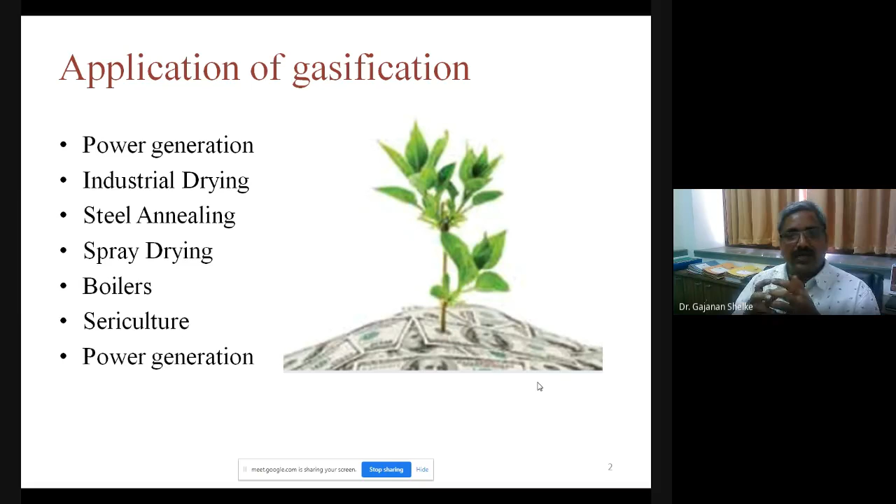I am not always in favor of jungle cutting, so that we use biomass, but there is ample agro waste - there is rice husk, soybean husk, wheat husk, moong husk. So all these husks, ultimately it is wastage. So we have to use this.

Then first we have to learn the gasification process. What is meant by gasification process? We know combustion - what is combustion? Suppose we take fuel as methane, CH4. CH4 in presence of oxygen, when it burns, it produces CO2 and H2O. There will be complete combustion, CO2 and H2O plus energy will be produced.

So this we are saying is the combustion process. But gasification is what? Gasification is a partial combustion, meaning the amount of oxygen is less than what is required for the combustion purpose.

So gasification process has various reactions. First part is the oxidation reaction, second part is the reduction reaction. So it is a thermochemical process - heat is there, also chemical process is there, so reactions will be there.

The reactions are: oxidation reaction, C plus O2 gives CO2, and it will liberate 393.8 megajoules per kilomole of energy. Hydrogen is there, H2 plus half O2 gives H2O plus 242 megajoules per kilomole of energy. So this is the oxidation reaction, meaning combustion is there.

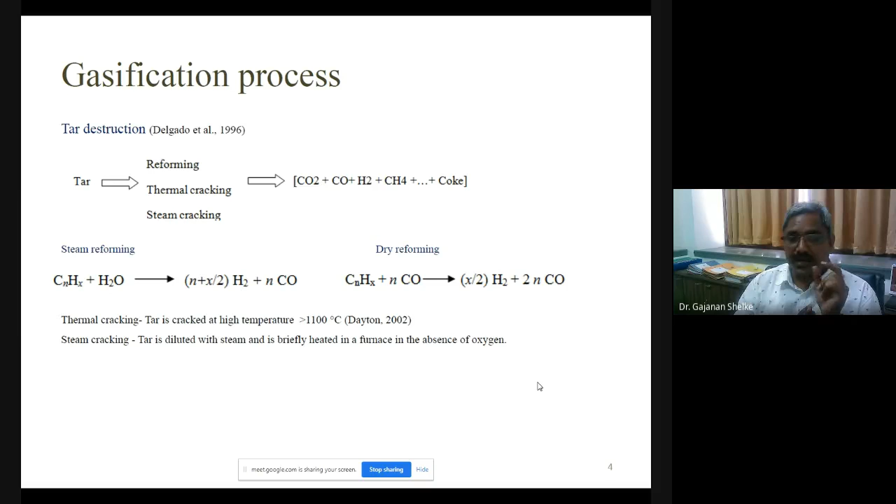Researchers have studied that the pyrolysis process is a thermal process occurring only due to heating in the absence of oxygen. Similarly, in steam cracking there is no oxygen - in the presence of steam at high temperature, tar is cracked. What is tar? We'll learn that afterward.

Then come to the main point - we are starting with the gasifier. The device in which the gasification process is going on is called the gasifier.

Then there are two types. Major types are fixed bed and fluidized bed.

Fixed bed means what will be the fuel inside it? That is, in batch we are providing it. Suppose a container is there, so we are feeding biomass in it, around 30 kg, 40 kg, maybe up to 100 kg as per the capacity of the gasifier. It will be sealed with the surrounding, so there will be no interaction between the container and surrounding. Hence the mass of the biomass is fixed. What we have to gasify, that mass is fixed. So it is called the fixed bed gasifier.

Then fixed bed gasifiers, there are various types of fixed bed gasifiers: updraft gasifier, cross draft gasifier, and downdraft gasifier.

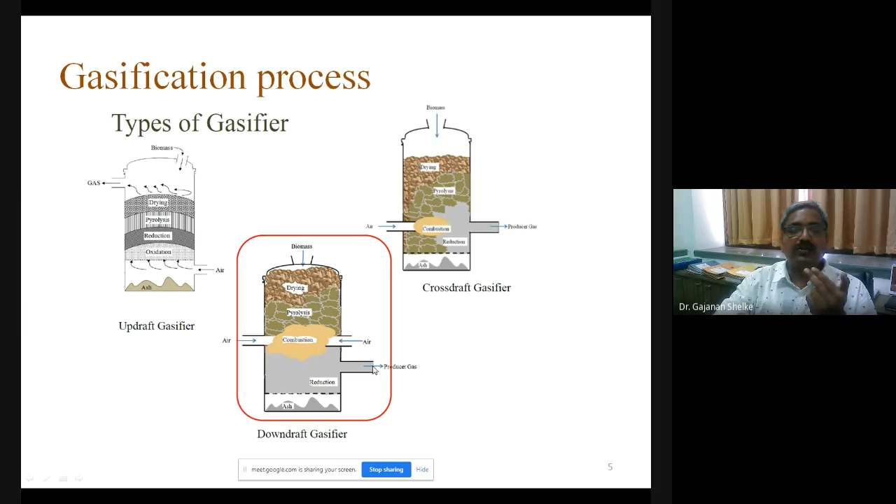Here reduction is going on, and this reduction produces the producer gas. As the flow is downflow, the flow of the producer gas is downward, so it is obtained from the downward side. So it is called the downdraft gasifier.

Then next is the fluidized bed gasifier. One thing you learned is what is the fixed bed gasifier: fixed bed gasifier means we are providing the feedstock in batches. What is the fluidized bed gasifier? Here feedstock is fluidized.

Now what do we mean by fluidization? Here the question will come to mind that biomass is a solid, so how are we saying that it is fluidized? What do we mean by fluidized then? How can the solid work as a fluidizing material? What is the property of fluidization?

So fluidized, again a thing will come to mind: there will be a liquid, it behaves like a liquid, so it is fluidized. But not now, you can see this bottle, in this bottle there is water.

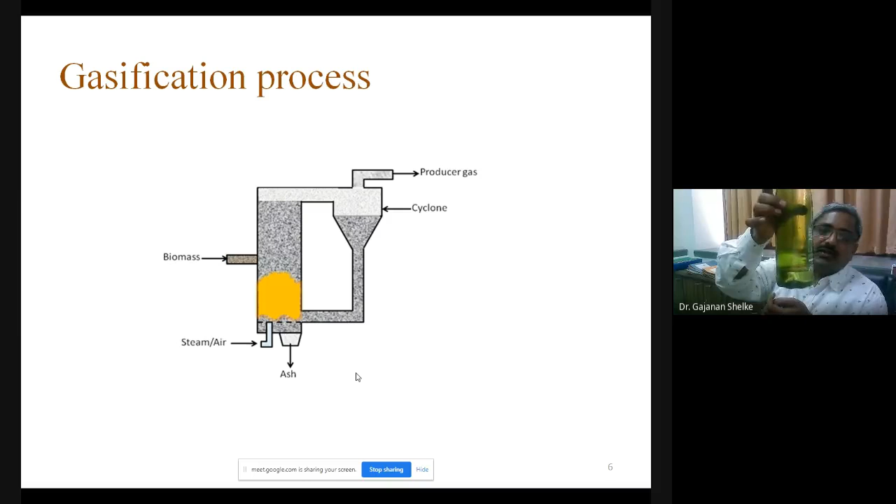Just I will explain this with another figure. We know, suppose we are taking a glass of water, and this is the glass of water, it contains the water. So what happened? Suppose you tilted this glass in this way.

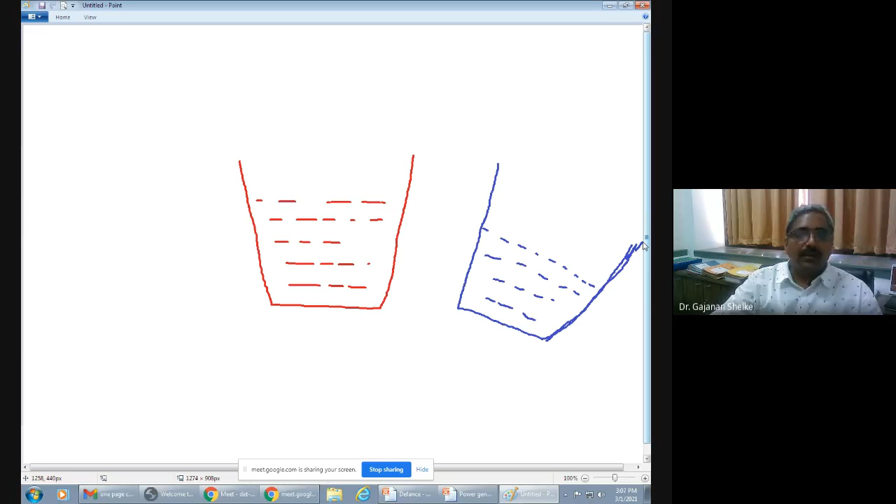Okay, now this glass is tilted. So what about the water? Will water be in this position? Will water also be in this position? No, not at all. It will not be tilted. So will this water layer be in an inclined position? What will be your observation?

Have you tried this sometime? Okay, second example: in the morning you are taking tea. In a cup, when the cup is kept on the table, what will be the level of the tea in the cup? Now you want to take that tea, so you are tilting the cup. What is your observation? Is that layer also tilted? Never. This layer will always be horizontal.

Fluid always maintains the horizontal layer. Though it is tilted, the fluid will always maintain the horizontal layer. And if any solid possesses this property of the fluid, that is called the fluidized material.

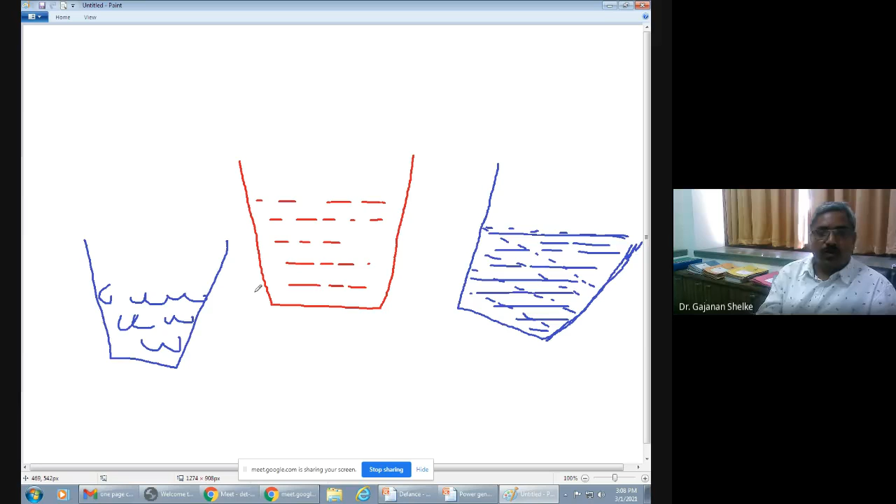Then sand is there. Have you observed sand? Take sand in a cup and just observe what happens. If you tilt the glass, what happens? That sand also takes the horizontal position. So such kind of material is used for the fluidization purpose.

Using this principle of the solid material, using this fluidized property of the solid material, we are obtaining the fluidization process. Now here you are observing the figure. In this figure, an aerator will be there.

So steam or air will be entering. Here there is a mesh of small holes, about 1 mm to 1.5 mm, sometimes 1.8 mm holes made on this. So through this, air is passed. So this air, here a bed of sand will be there.

Bed of sand. Now above this sand we are pouring the biomass. So what happens when this air is aerating, when air is coming at pressure inside it? That sand just behaves like a fluid. Just as you observe bubbling if you pass air through water, the same pattern will be followed here.

And what is happening then? This sand carries the biomass with it. That is the fluidization process occurring with the sand for the biomass.

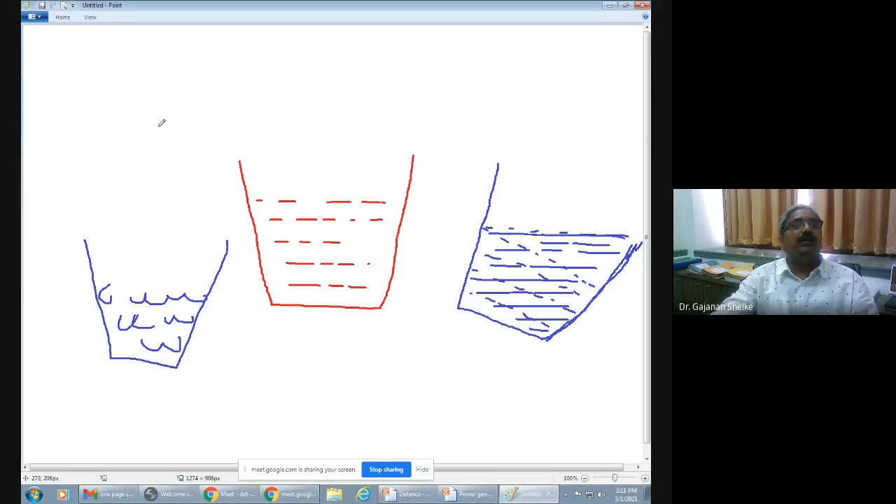So here is the cyclone. You are observing the cyclone. What is this cyclone? Cyclone separator, you may have heard the name. So how will it be? The figure is in this fashion.

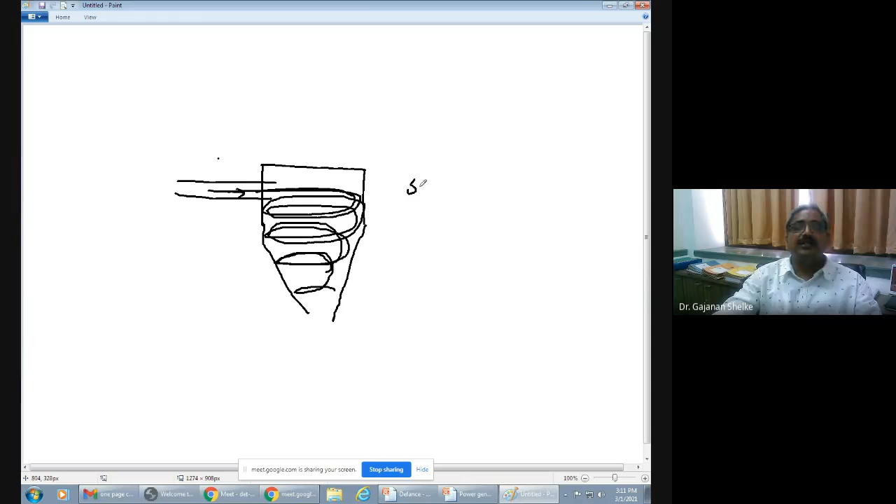So gas is coming from this side, moving like this. What will be the material? Here there will be centrifugal force. Due to this centrifugal force, it will separate solid and gas. This will separate the solid from the gas.

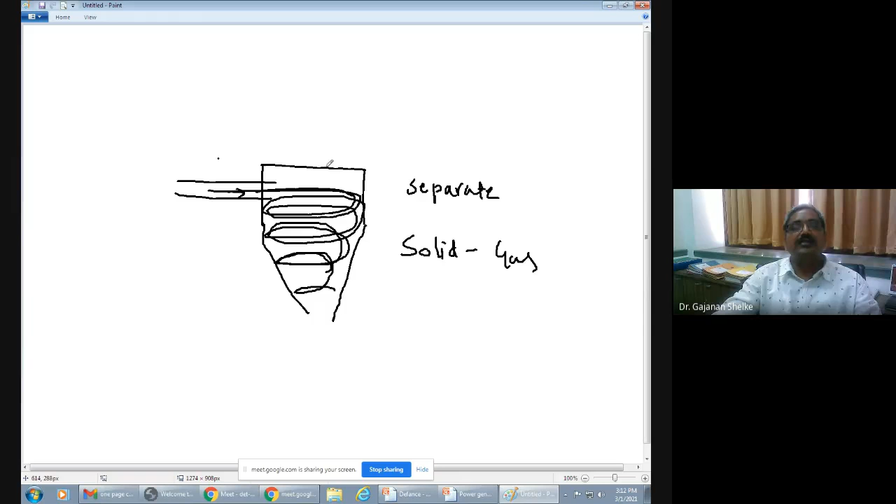So what about the gas? Gas is light, so it comes from the top side. What will be the outward product? Because when it is coming from the fluidized gasifier, not only gas is coming — since this is the aerator, air is coming, aeration is going on, and sometimes by a centrifugal pump, or sometimes by a compressor or centrifugal force.

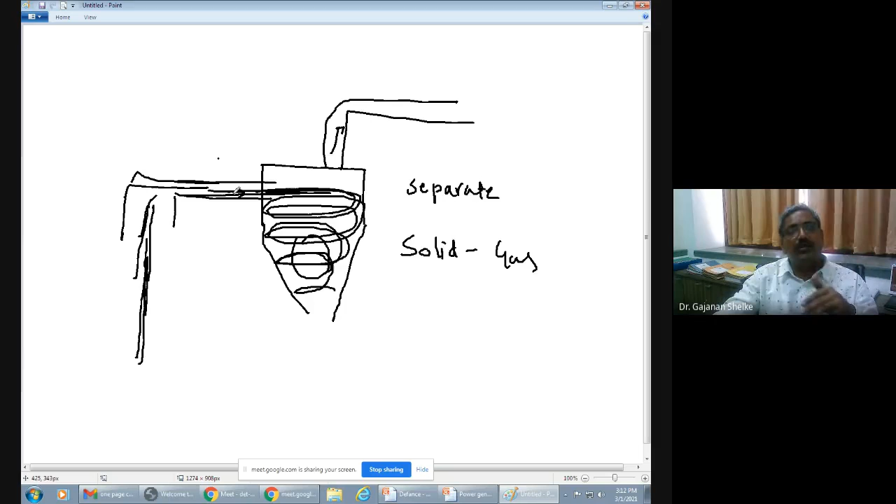Okay, so here air is coming along with unburned hydrocarbons, so the solid particles come downward and are again provided to the gasifier unit. So this is circulating. Hence it is called the circulating bed gasifier.

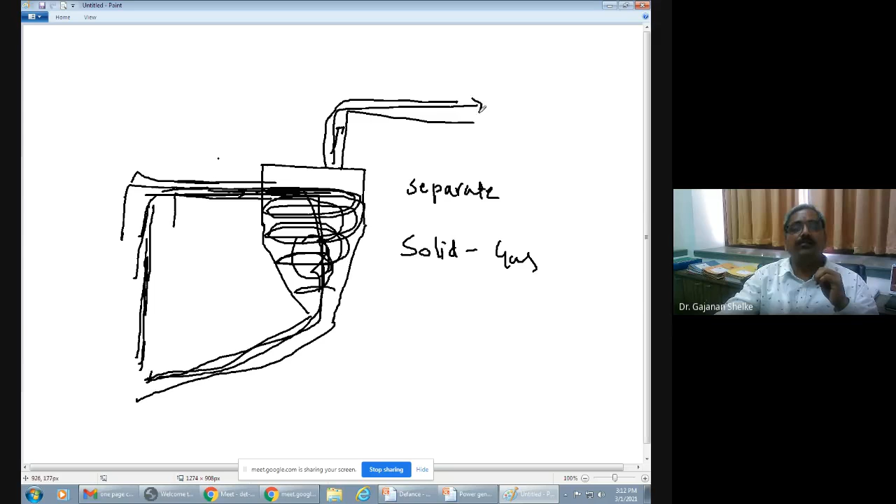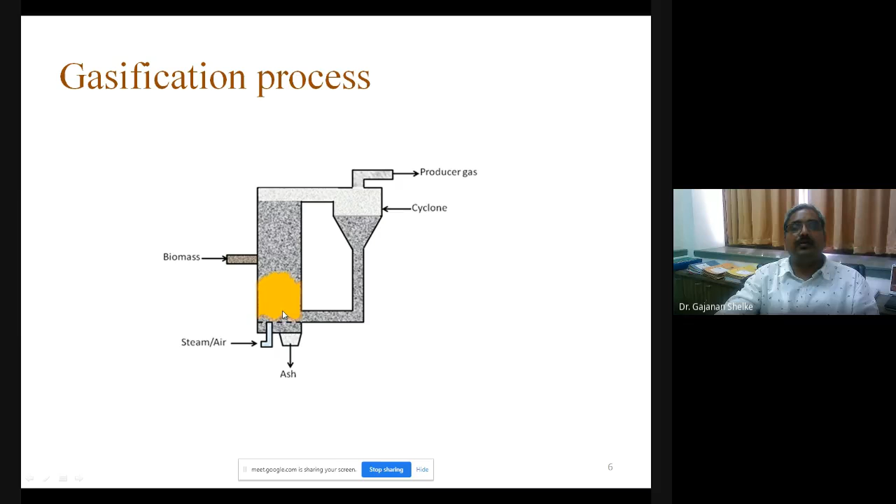Gas is coming from the top side. Here you are observing the cyclone. Under centrifugal force, this solid biomass is returning again, and this producer gas is coming from the top side.

Heavy hydrocarbon means it could not break easily at a low temperature. We have to go for thermal cracking up to 1100 degrees Celsius. So this is how its nature is. It is not only heavy hydrocarbon but also sticky in nature.

So this was, we had visited with the kindness of Honorable Mahanta sir. I got the opportunity to visit this plant, and at that time there was a Ramakrishna Gov owner. He was a literally frustrated person, because this tar was the main headache for him.

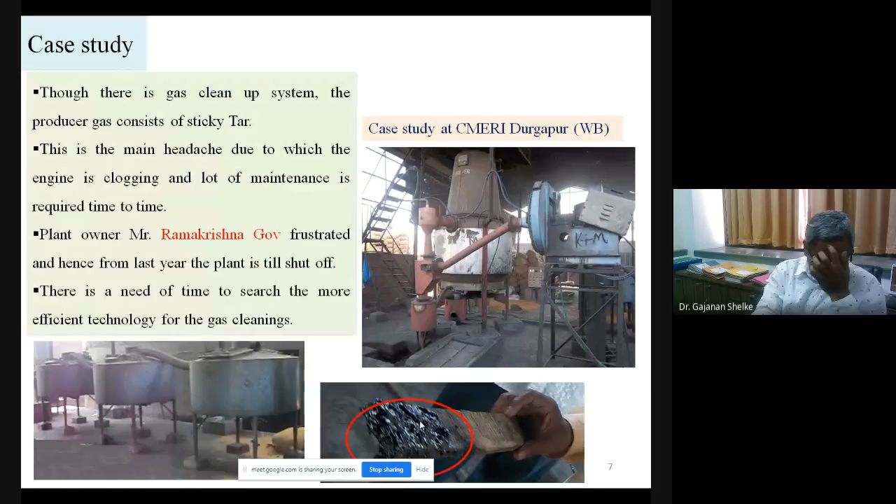But ample of tar, what to do with this tar? Coal is formed, bamboo charcoal is formed. After that, what about this tar? Liquor can also be used in various chemical industries. But what about the tar?

So this tar is used for road preparation, but it is a heavy hydrocarbon. If we succeed in cracking this tar, again a gas will be produced, and again we can have more power generation through this tar.

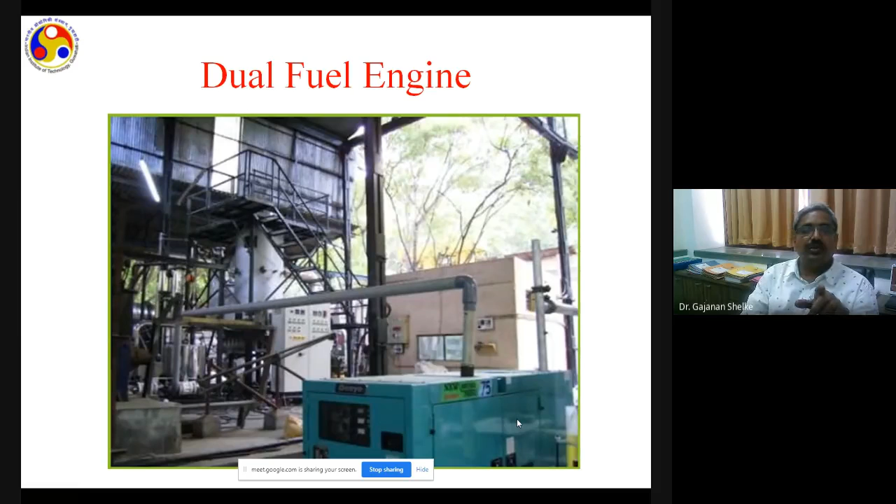So this is the dual fuel engine you are observing. Producer gas is given to the dual fuel engine. It produces power, but the main headache we had discussed remains. So this is the engine running on producer gas.

So then when we are studying all this, we have to go for characterization. We have to first go for the characterization of the biomass. So though we are going for experimentation with the fixed bed gasifier and the fluidized bed gasifier, we have to go for characterization. Difference between fluidized and fixed bed we have studied, but again, what about the feedstock?

Feedstock for the downdraft gasifier or fixed bed gasifiers is required in solid form, whereas feedstock in case of the fluidized bed gasifier is a fluffy mass. It is just like dust, sawdust, or rice husk in powder form. That is used in the fluidized bed gasifier, because it is not easy to fluidize solid materials and to pour solid materials also inside the fluidized bed gasifier.

But the same is not possible if we use the fluffy mass in case of the downdraft gasifier — it will just be dumped, just be packed, and there will be no chance for gasification. Hence, these are the main limitations of both the fixed bed gasifier and the fluidized bed gasifier.

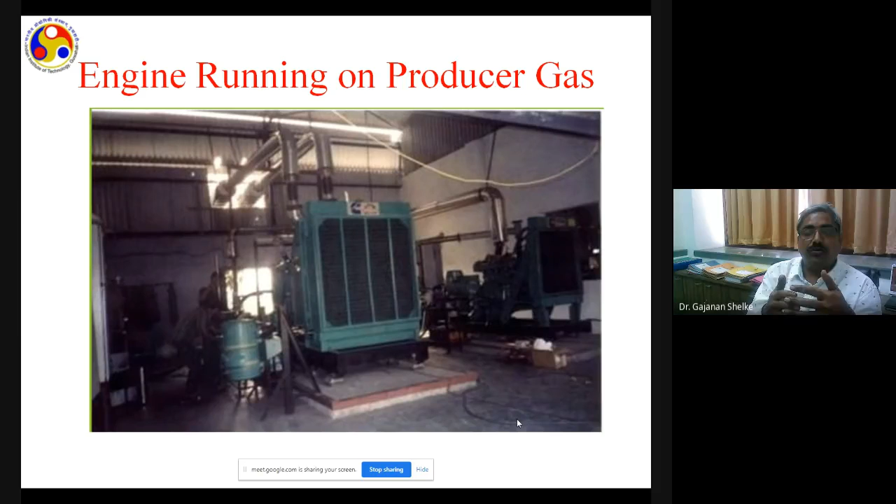Whatsoever, whether we are using the fixed bed or fluidized bed gasifier, we have to go for characterization of the biomass. Various biomasses are there: rice husk, soybean, wheat husk, formed during agriculture as agro-waste. We have to do the characterization, to know what will be its content, its carbon, its hydrogen. Then we have to go for the ultimate analysis.

This ultimate analysis gives the carbon percentage, hydrogen percentage, nitrogen percentage, sulfur, ash, and oxygen. Here is a particular example: sawdust contains 44.547% carbon, 8.872% hydrogen, 4.462% nitrogen, no sulfur, only 1% ash, and 41.119% oxygen.

Similarly, you are observing the composition for rice husk, and for mustard husk powder. You can go for soybean or any other agro-waste also. And it is the beauty of biomass that it has very less sulfur content, which avoids acid rain.

So nowadays researchers are going for co-gasification. What do we mean by co-gasification? Combination of coal and biomass, mixed in certain proportion. What will be the benefit? The sulfur dioxide that forms in case of coal will be reduced by using biomass with it.

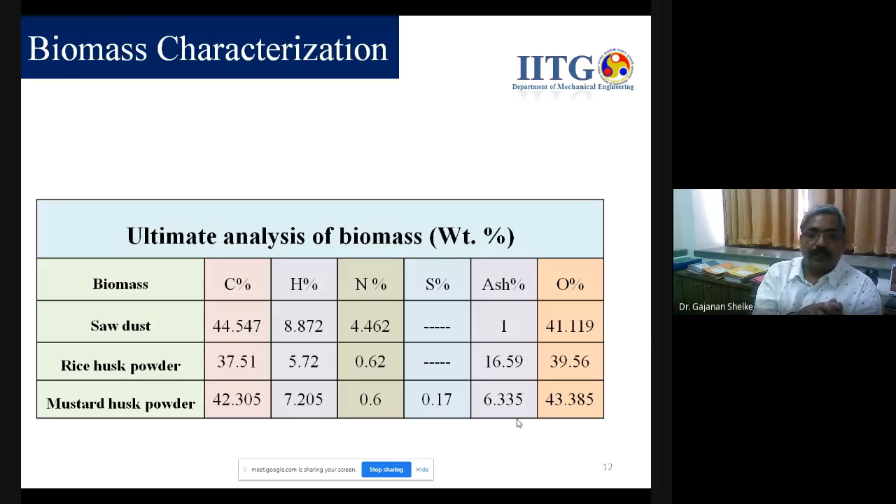So this is the ultimate analysis, the characterization. So how do we produce, how can we produce feedstock for the fixed bed gasifier?

In general, there is a normal process: we are taking the wood. There is a wood cutter, you are observing. With the wood cutter, we are going for wood chips. But is it desirable to use these wood chips? No, because we have to go for jungle cutting, forest cutting. So we have to avoid this.

Then what will be the alternative methodology? The alternative will be to prepare briquettes. We had set up one example under the guidance of my sir, who suggested using a binder: waste newspaper. What is the role of waste newspaper? If you put newspaper in water, it produces a somewhat sticky liquid. So we used in proportion this waste newspaper, biomass, and water, and by hand formed the briquettes.

These are the briquettes formed by the hands. This sticky solution of waste newspaper and water, plus sawdust, maybe rice husk, maybe mustard husk, was manually formed into briquettes. We had used various compositions.

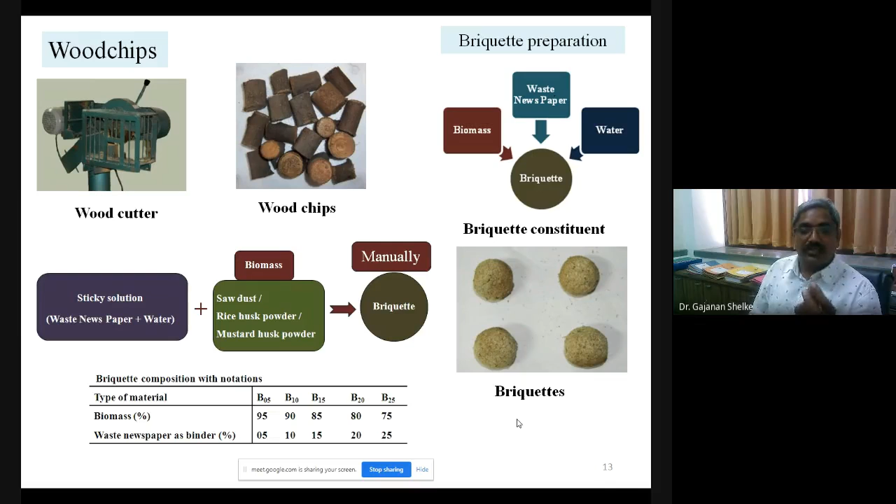So the type of material, we had nominated as B05. B05 means biomass 95%, waste newspaper as a binder 5%; similarly B10, B15, B20, B25. We observed that with B25, you can use this briquette as a ball for playing cricket for a small while - that much strength it has.

Next is what we can produce: the pellet. Here you are observing the pelletizer, which has rollers. These rollers have holes through which biomass is compressed in between them, and this roller rotates about itself as well as about the lock nut. So the biomass is compressed in between it, and a pellet is obtained.

Then, at that time, we worked on dolomite, which can be a good tar cracker. So to reduce the tar, we used dolomite, and mixing this dolomite, we checked its properties with the X-ray diffraction pattern. This is the X-ray diffraction pattern you are observing, and it is as per requirement.

We use this dolomite and pellets are obtained. There is high pressure as well as heat due to rotation, and pellets are formed. So pellet composition again is biomass and catalyst: P00 we designated as 100% biomass, P10 as 10% dolomite, P20 as 20% dolomite, and like that we gave the nomenclature. So these briquettes and pellets we can produce from agro-waste, instead of cutting the wood.

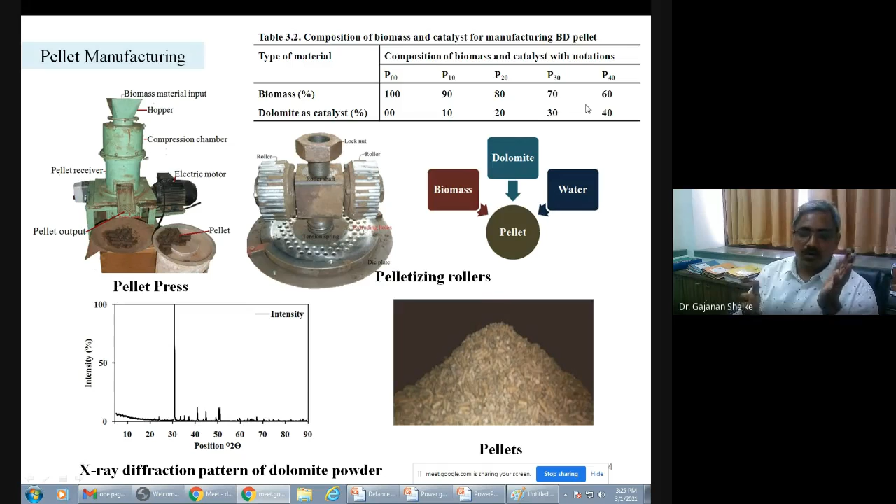Then we had gone for various tests. The first test was proximate analysis. Ultimate analysis is done in the laboratory, but proximate analysis we can do in a muffle furnace.

What will be the condition if we keep it at around 100 to 105 degrees Celsius in a muffle furnace for 3 hours? Whole moisture will be removed, and you will get a completely dry briquette or pellet.

Then, how can we obtain the volatile matter? At 550 degrees Celsius, in absence of air, we have to do the heating process for only 9 minutes, and the difference in weight will be the volatile matter.

Then we have to heat it at 550 degrees Celsius for 6 hours. So it will be completely burned and ash will remain.

Then how much is the fixed carbon? Fixed carbon equals 100 minus moisture content plus volatile matter plus ash - that is the fixed carbon, considering the total as 100, that is the total solid. So we obtain how much moisture, how much volatile matter, and how much fixed carbon is in that biomass.

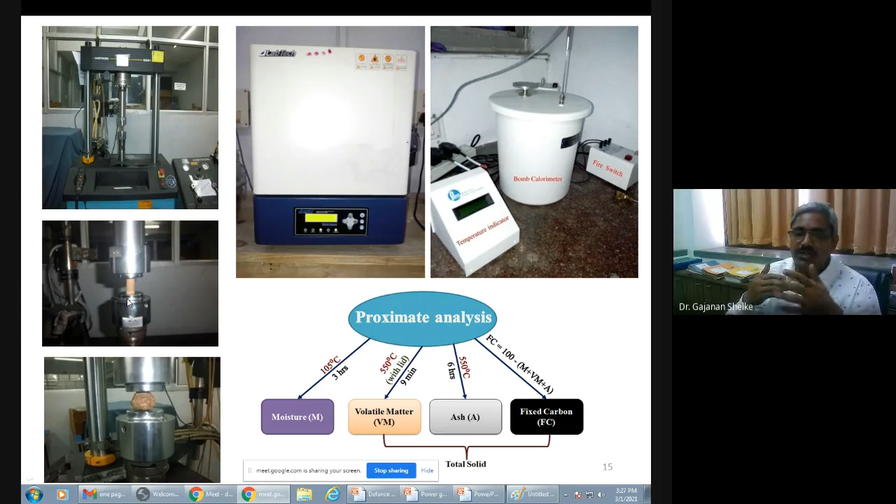Here you are observing another figure, where we are checking the hardness of this briquette and pellet. It is found suitable because for transportation purpose, if we are transporting briquette and pellet from one place to another, it has to sustain, and that will be checked by this hardness tester.

Then here you can observe these properties: moisture content in weight percentage for sawdust, rice husk powder, mustard husk powder, and briquette. For sawdust there will be more moisture content, whereas for mustard husk it is observed to be less. Volatile matter will be in the same situation.

In case of ash content, for sawdust it is less, and somewhat more than that there will be mustard husk. But for rice husk, there will be less - wait, there will be higher ash content by weight for rice husk.

Now observing the fixed carbon: fixed carbon is observed to be more in case of mustard husk, where it will be less in case of rice husk and sawdust.

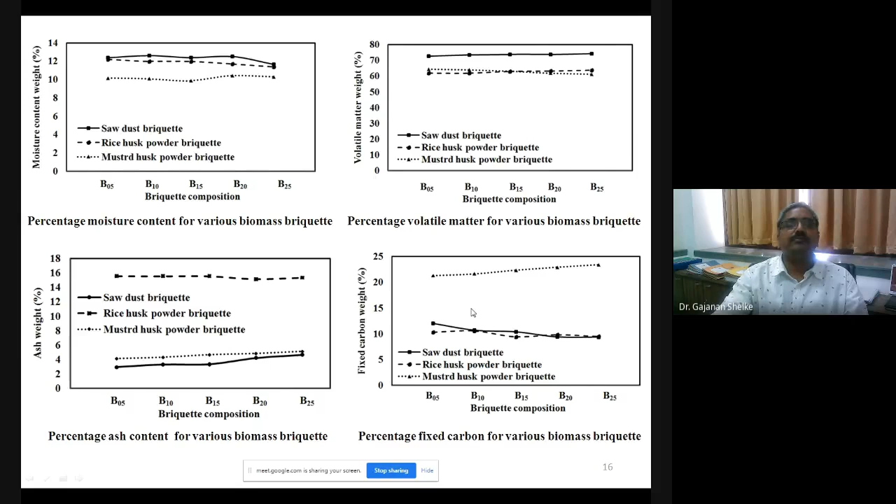Then similarly, we are obtaining the same graph for the pellet compositions: sawdust, dolomite pellet, and mustard husk powder, covering moisture content, volatile matter, ash, and fixed carbon.

So what are we observing? Sawdust has more moisture, and sawdust also has more volatile matter. Ash content of the sawdust is less, and fixed carbon for the sawdust is also less.

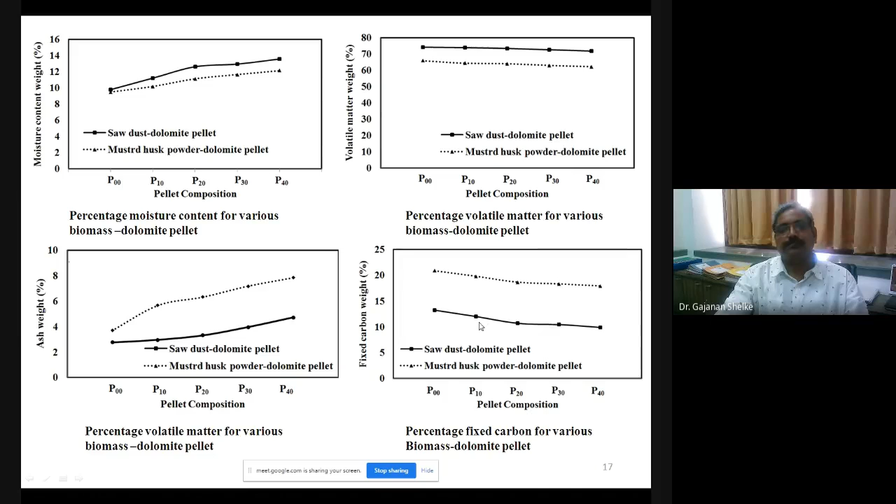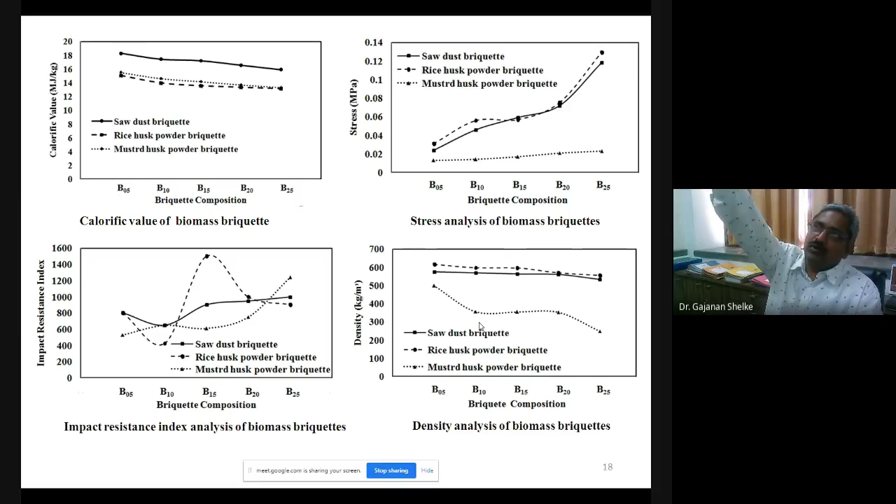Then, impact resistance index - how did we calculate it? You have to stand on the table and throw the briquette or pellet to the concrete ground. After how many times it will break, crack, or crash, we have to count, and from that we obtain the impact resistance index.

So observing the impact resistance index for sawdust, it is moderate. For mustard husk it is less. For rice husk we could not say definitively - sometimes it fails, sometimes it has good impact resistance index.

Then density - how are we measuring the density? Weight per unit volume. We had taken a specified random area, considered the volume, and then the weight. That's how we calculated density.

Stress we had calculated with the machine. You are observing that the more it is, the better it is. Rice husk will be there - this is the rice husk. But in case of mustard husk, it will be less.

Calorific value is calculated in a bomb calorimeter. Calorific value for sawdust is higher compared to mustard husk and rice husk. So ultimately, we are observing that sawdust is good.

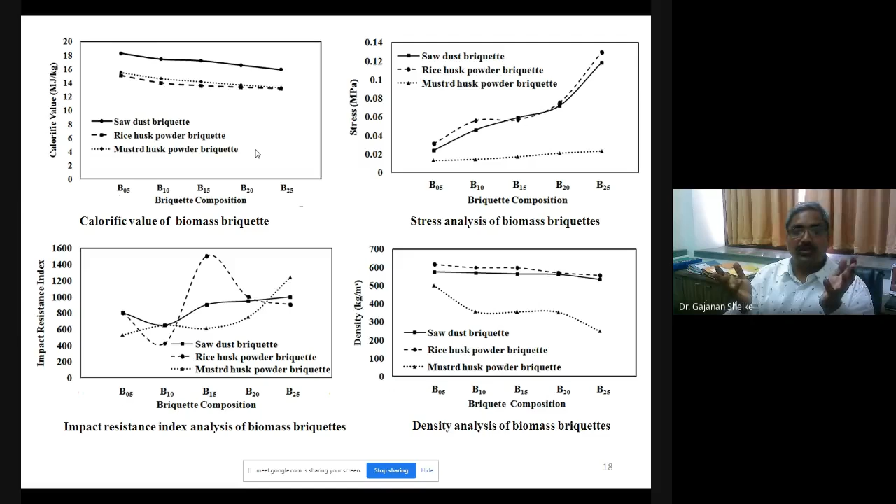But it doesn't mean that we should not go for other agro waste. We have to find what will be the good agro waste and go for it. Though there will be this difference, all the agro waste give producer gas. For the pellets also we have taken the calorific value, and it is observed that in all cases sawdust is good.

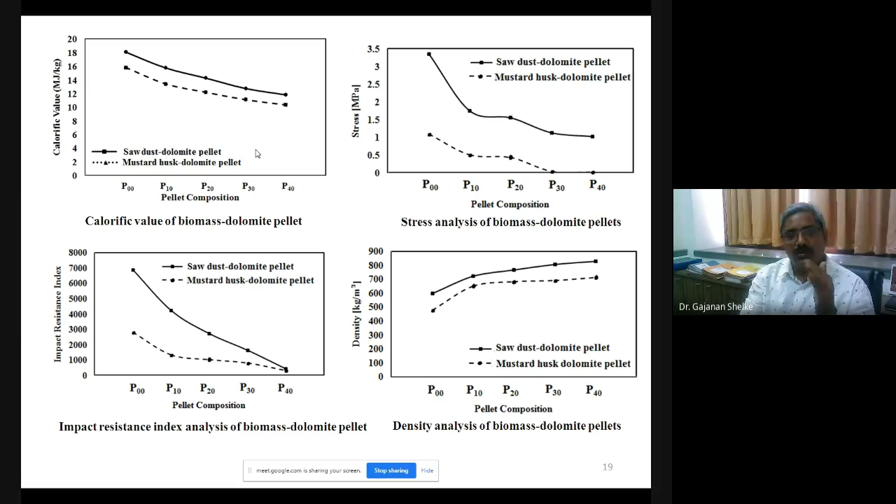Then there is the thermal analyzer - Perkin Elmer's Simultaneous Thermal Analyzer STA8000, for thermogravimetric analysis. It works on inert gas, with a heat flow rate of 10 degrees Celsius, and it is heated between temperatures of 40 to 900 degrees Celsius.

Thermogravimetric analysis. The device is a Perkin-Elmer simultaneous thermal analyzer STA8000. We had gone for thermal gravimetric analysis. What we obtain: if we heat a biomass, how its weight is decreasing. As the moisture is removed from it, its weight will decrease.

And what will be the heat release pattern at the same time? When fire is taking place, when the substance reaches its self-ignition temperature, only then fire is taking place. So here also, heat liberation will be started. Here also we are studying that.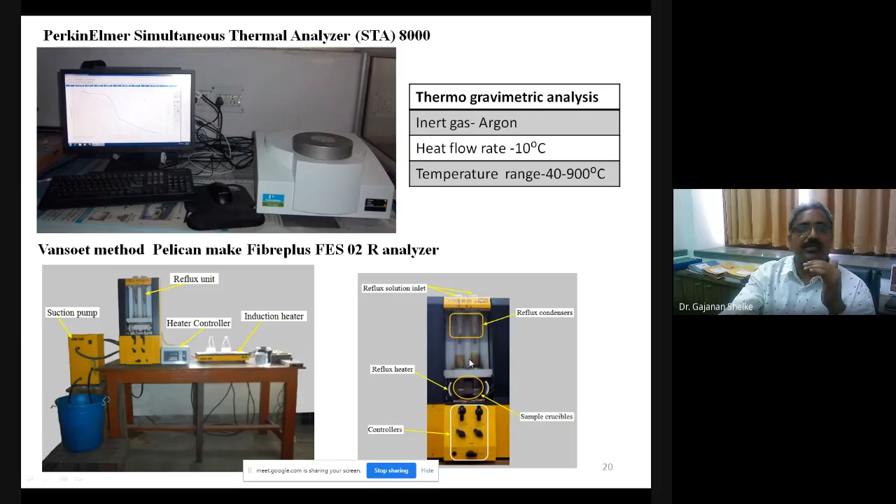Another method you are observing is the Van Soest method, using a Pelican Fibreplus analyzer. Here we are finding the lignocellulose characteristics: cellulose, hemicellulose, these three components in it. A reflux heater is there. Samples are placed in the crucible, and it will be fluidized at a certain temperature, so you are obtaining its contents.

So thermogravimetric analysis you are observing here. Again, we have done it for sawdust, rice husk, and mustard husk. What you are observing? There are 4 phases.

So this is again the same figures. Now come to the experimental setup and what will be the procedure if we want to perform an experiment on the downdraft gasifier. We have specifically selected the downdraft gasifier, as you had observed in this figure. What is at the top?

Drying. After that, what is it? Pyrolysis. And the biomass then undergoes the combustion process, where high temperature will be there. So what about inline tar cracking? This is more desirable in the case of the downdraft gasifier. Hence, we selected the downdraft gasifier for the experimentation.

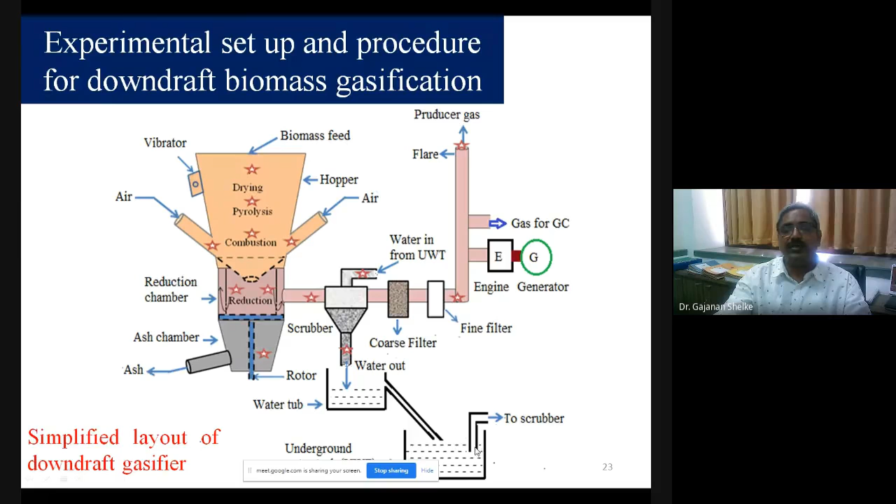The air flow meter provides the flow rate. Air is supplied to the air flow meter, and from it, on two sides, there is an air inlet. This is the hopper. So thermal analysis we had carried out for this.

Thermal analysis means we want to know what temperature is there and how the gasification process is taking place, at what place and what temperature. So for that, here you are observing the thermocouples. Thermocouples are there. Okay, so then this is the engine.

What temperature will be there? Lower part you are observing. This is the reduction chamber, and here there is a scrubbing unit. Scrubbing unit means water and gas will be directly exchanging heat. Tar in the gas will be condensed, and then it goes afterward to the filtration unit, and tar will be accumulated in one tank.

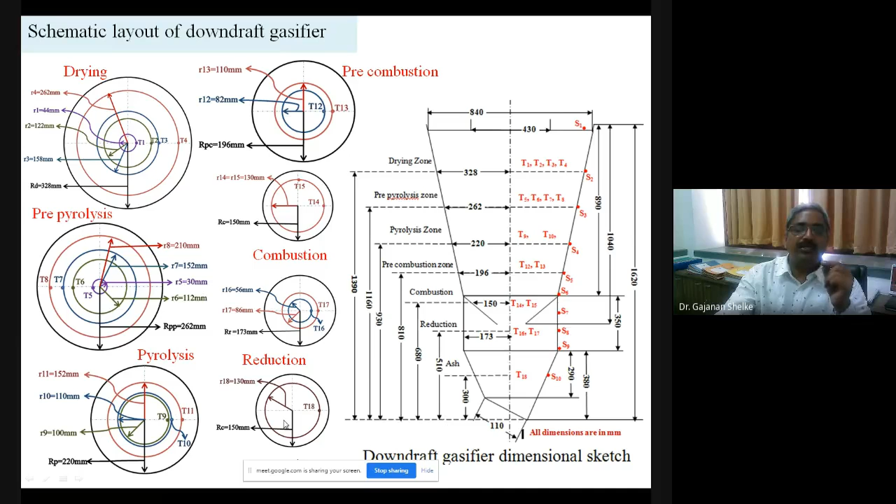So here at various locations we had calculated the temperature. We had seen the temperature, what it would be, and how the process is going on inside. And then in the reduction chamber also we put the thermocouples, meaning at what temperature the reduction process is taking place.

So this is how the thermocouples we had put inside it, you are observing. These are the holes for the thermocouples. So this is the thermocouple casing, we had taken the pipe. Through that we had passed the thermocouple, and that thermocouple senses the temperature and gives the reading.

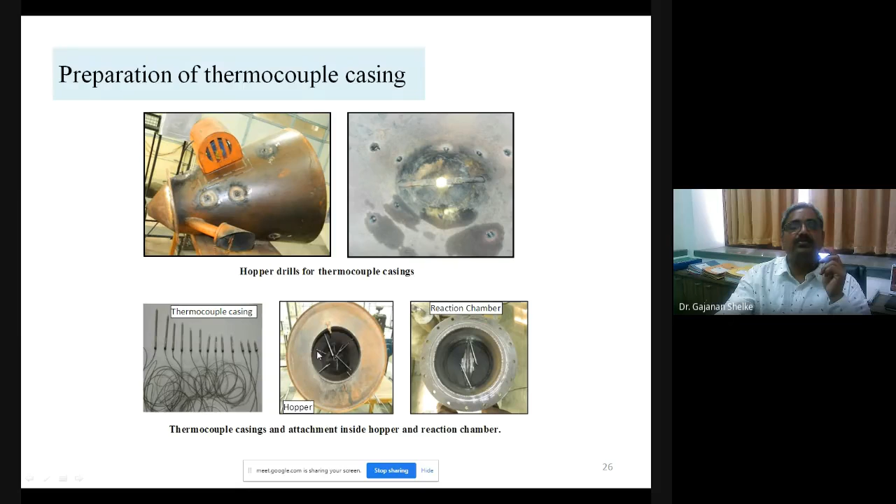So how many thermocouples are used are given here. Inside the gasifier there are 18 thermocouples. In the producer gas line there are 7, and on the surface of the gasifier there are 11 thermocouples. We put thermocouples on the surface to measure how much heat is also going to the surrounding, because heat is transferred by conduction, convection and radiation. So how the heat is transferred to the atmosphere and how much it will be, for that also we had kept thermocouples at the surface.

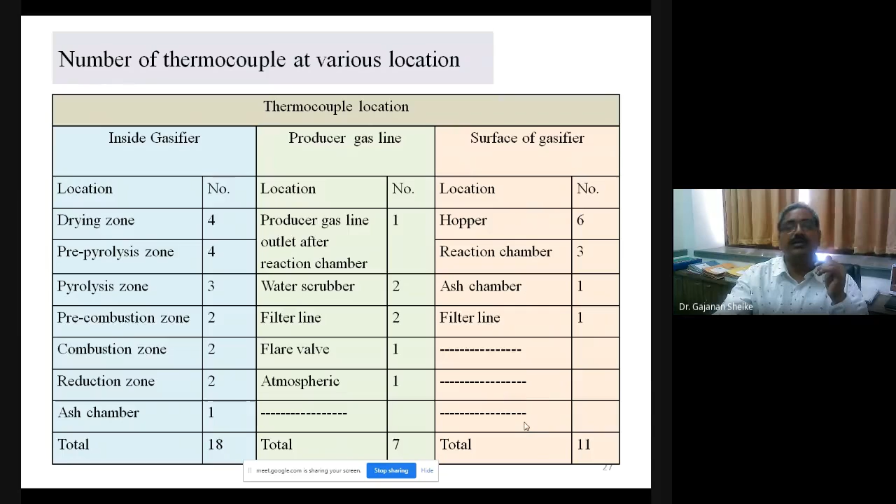And this is the flame you are observing. This continuous flame we are getting, right? So this is the blue flame you are observing. This is the red flame. When a red or yellowish flame is there, there will be some light water content present, and at that time it behaves like this.

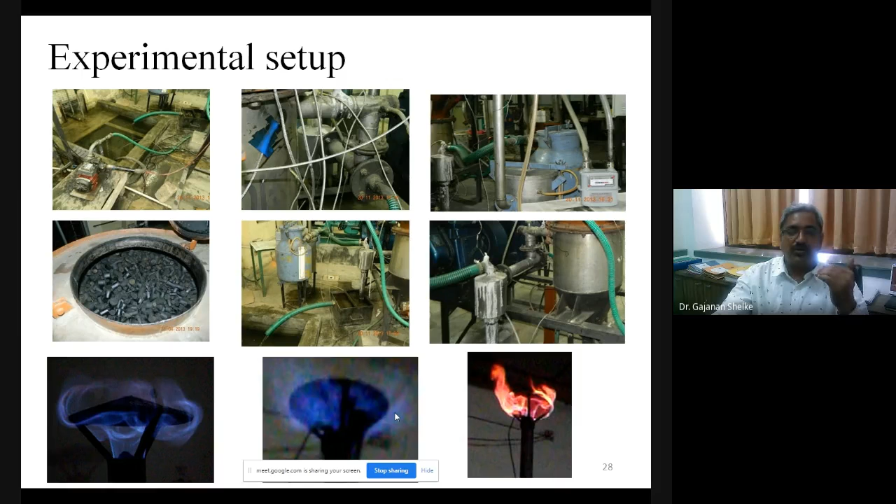So here the flame we are getting, we generate the producer gas in the lab at IIT Guwahati, and this will be utilized in the dual fuel engine, which is connected to the generator. This unit is connected to the generator, which produces the electricity.

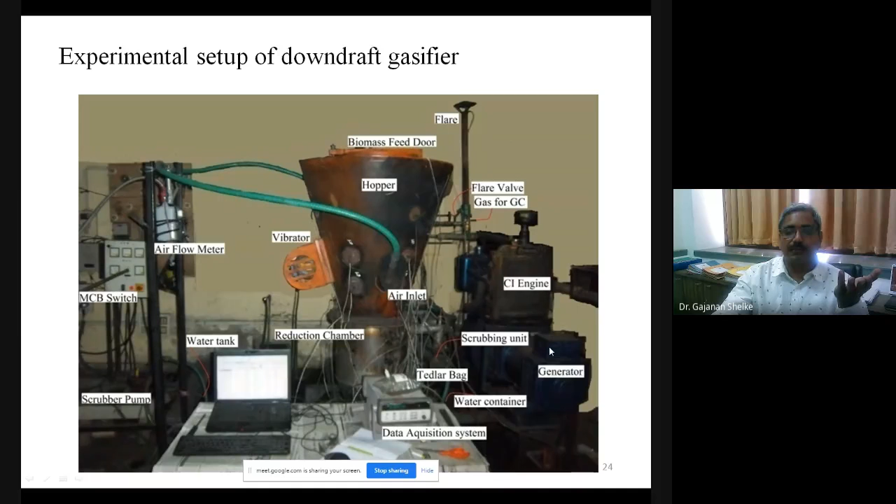So here you are observing, this is filter 1. This is the tank. Here you can observe how much tar is collected, water tank. Then this is the coarse filter. Coarse filter means biomass - here the sawdust is kept, through it the gas is passed, so here the tar is accumulated. This is the fine filter, a cotton bag is there, through this the gas is passed, so the tar will be collected here. In this way, the gas cleaning unit is taking care of the gas cleanup.

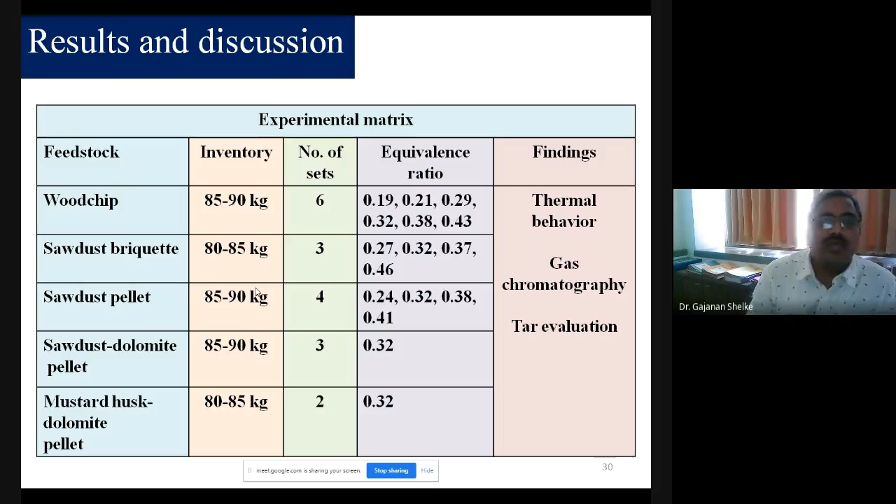Then we have to calculate the equivalence ratio - how much air is there, how much air is required. So the equivalence ratio is 0.19, 0.21, 0.29, because the air flow rate, how much air we are providing, that we had measured. How much producer gas is there, that also we had measured. So this gives the equivalence ratio, and that gives us the thermal behavior, gas chromatography, and tar evaluation - these are the findings we had done. For all that, mustard husk was tested at 0.32 equivalence ratio, and sawdust with dolomite pellet at 0.32.

Then this will be the thermal analysis - how it will be behaving in the drying zone. Initially it is at 30 degrees Celsius, around atmospheric temperature. Then this temperature increases, it goes up to 85 degrees Celsius. Then in the pre-pyrolysis zone, it goes up to 200 degrees Celsius. Then in the pyrolysis zone, how much temperature is there? Up to 250. In pre-combustion it is up to 450.

Then in combustion you can observe, this is the combustion - 1000 to 1200 degrees Celsius, the combustion process is going on. The ash chamber will be hot, sometimes it goes to 85 degrees Celsius. So if we observe the various zones, the thermal analysis is carried out. It is mostly in the combustion chamber. Then there will be the reduction zone - reduction is taking place at 450 degrees Celsius, meaning gasification is taking place at 450 degrees Celsius. Then the drying and all that will be at low temperatures, between 0 to 200 degrees Celsius.

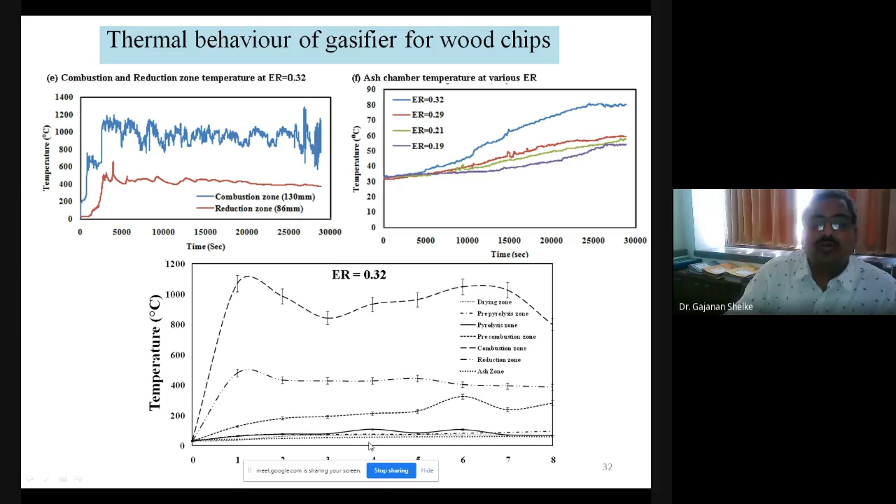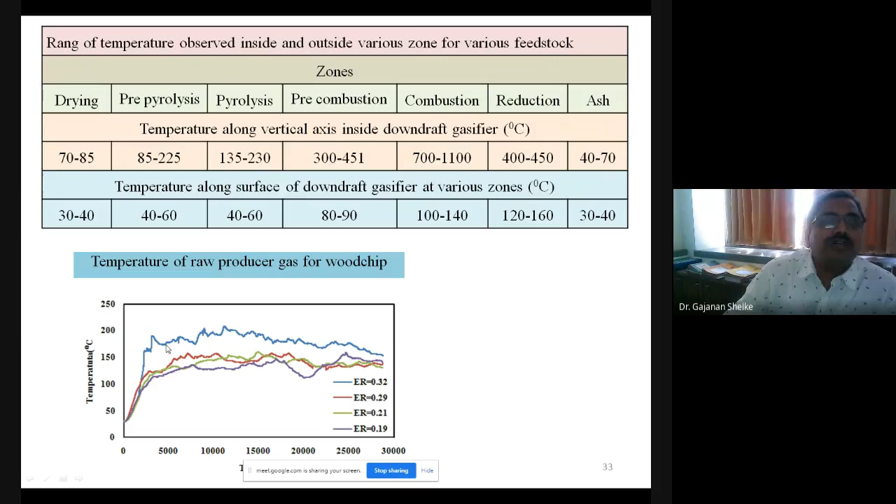A similar profile will be carried out for the wood chips, with this equivalence ratio, these are the temperatures. Now consider this is the gasifier - this is the drying zone, how much will be the temperature here? Just up to 85 degrees Celsius. From this graph, you can come to know the temperature. In pre-pyrolysis, temperature will be around 100 to 120 degrees Celsius. In pyrolysis, it goes to 180 degrees Celsius. In the combustion zone, temperature is around 1000 degrees Celsius.

And then there will be the reduction, at around 350 to 400 degrees Celsius. And then at last, the ash will be at 50 to 60 degrees Celsius temperature. So this is the gasifier, and at different heights, different zones will be there - drying zone, pre-pyrolysis zone, pyrolysis zone, pre-combustion zone, combustion zone, and reduction zone. In that way, we have obtained this thermal analysis. So we can see that the combustion process goes up to 1200 degrees Celsius - that much temperature is required. At the same time, reduction, meaning the gasification process, can be obtained at just 400 degrees Celsius.

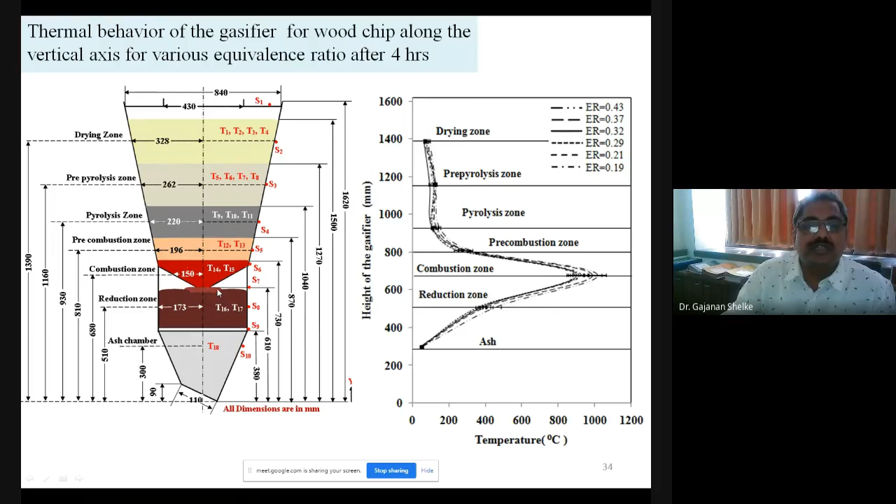So this is for the wood chip, okay, this is.

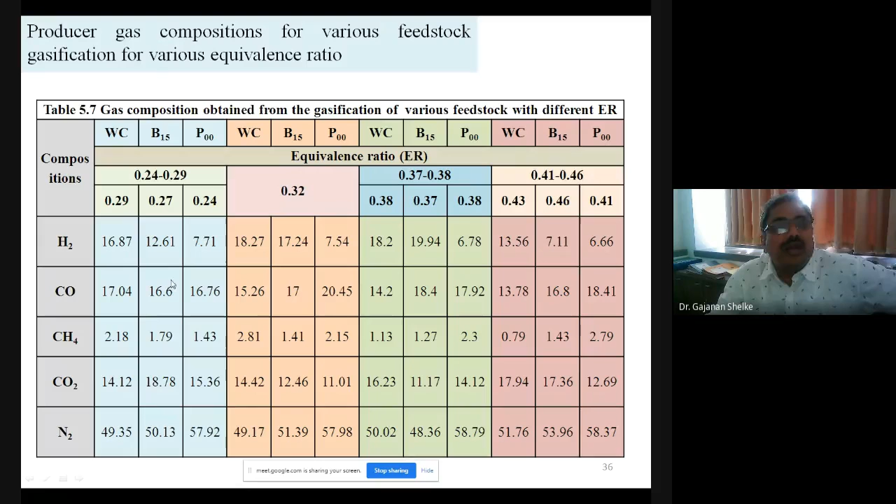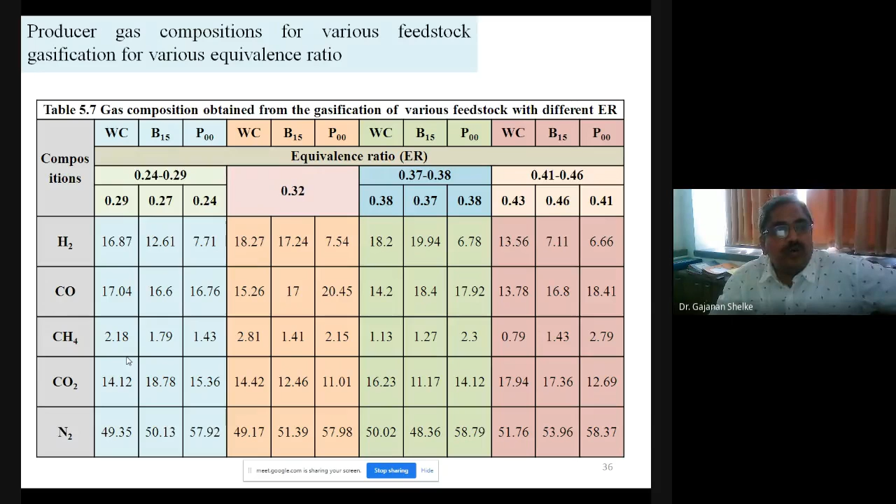What will be the gas composition obtained from the gasification of various feedstock with different equivalence ratio? Don't go into too much detail on the equivalence ratio, just see the composition. Hydrogen is 16.87, carbon monoxide 17.04, methane is 2.18, CO2 is 14.12, nitrogen is 49.35. At various equivalence ratios, experiments are carried out to find how much the gas composition will be. We collect this gas into the Tedlar bag, and we go for gas chromatography afterward, which gives the gas composition: hydrogen, carbon monoxide, methane, CO2, and N2.

Similarly, for sawdust pellet, P20 gave good composition, giving hydrogen 17.9%, carbon monoxide 22.8%, methane 2.67%, and gas flow rate is also 2.41 normal meter cube per kg. So comparative analysis: sawdust dolomite pellet P20 gives the good composition of producer gas: 17.90 hydrogen, carbon monoxide 22.80%, methane 2.67, carbon dioxide 16.39, and N2 is 40.11.

We are interested in this only: hydrogen, carbon monoxide, and methane.

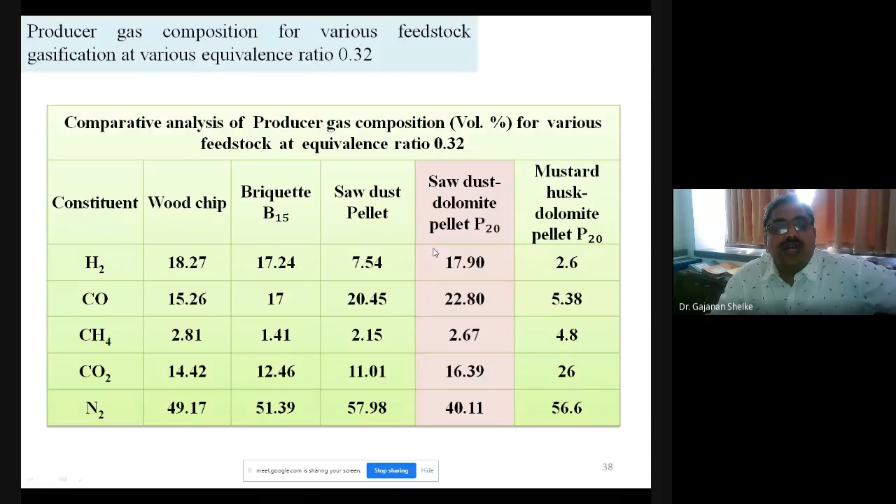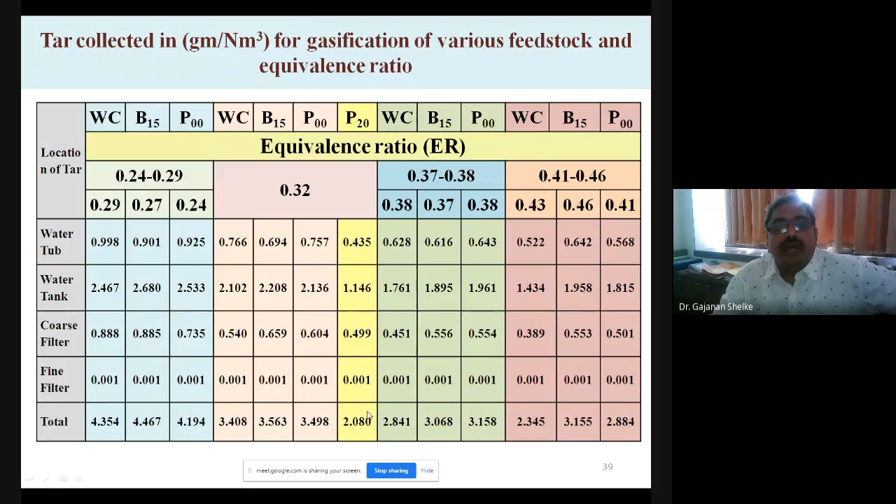How much is it? Then tar collected - this is the water tub. How much? Water tank, coarse filter, fine filter. So 4.354 grams. If we go for continuous operation, it will be collected in higher amount. Where it is collected less, that we have to find. So here it is only 2.080 grams.

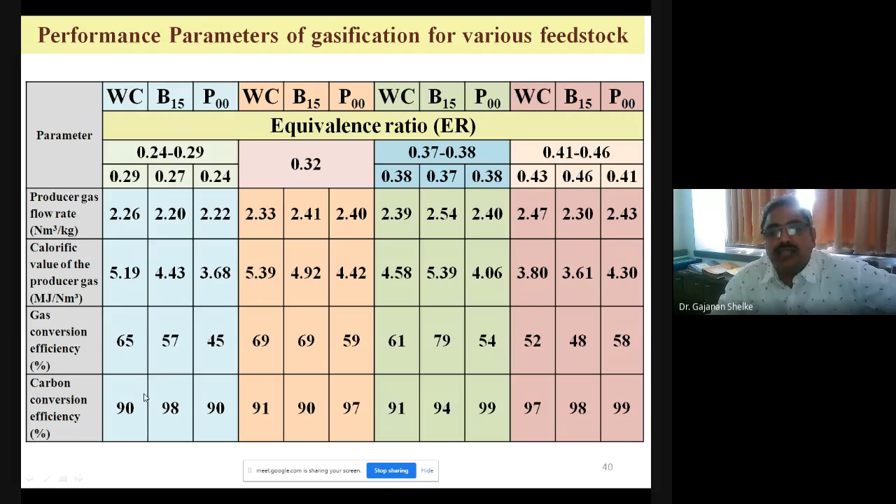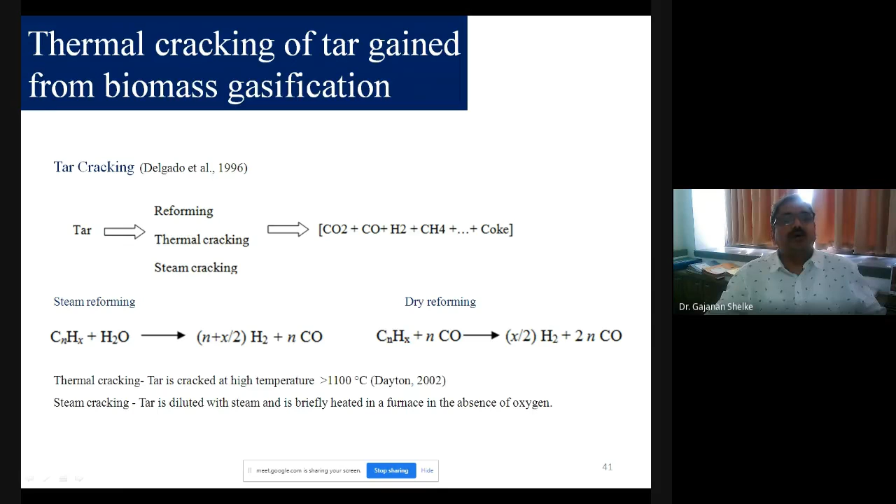Okay, then we have to go for the tar cracking. We are moving towards the end now. So tar cracking - we had already seen reforming, thermal cracking, and steam cracking. I will not discuss again in detail, we will go for the experimentation.

Then bubbling fluidized bed gasifier, meaning the substance will be fluidized. So what we had done here - we had taken tar. It operates on the principle of bubbling fluidized bed. There are various types of fluidized bed gasifiers also, but we don't have that much time to go into detail. It operates on the principle of bubbling fluidized bed.

If tar is heated to a temperature of 800 degrees Celsius, as we have seen, it will be cracked - 800 to 1100 degrees Celsius for thermal cracking. Here also we are using dolomite as a catalyst, and it will get cracked into lower hydrocarbons.

So the operating matrix is that we are giving heat input through the heater up to 3.5 kilowatt. Air flow rate is 0.15 liter per second. We are using dolomite weight percentage. Then water flow rate in the gas scrubbing unit, because in a similar way here also we scrub the producer gas with the help of water.

So here you are observing - this is where the heating element is, the tar will be kept here, this is the aeration pipe, bubbling will be done, heated at higher heat, there will be cracking of the tar. What will be the result?

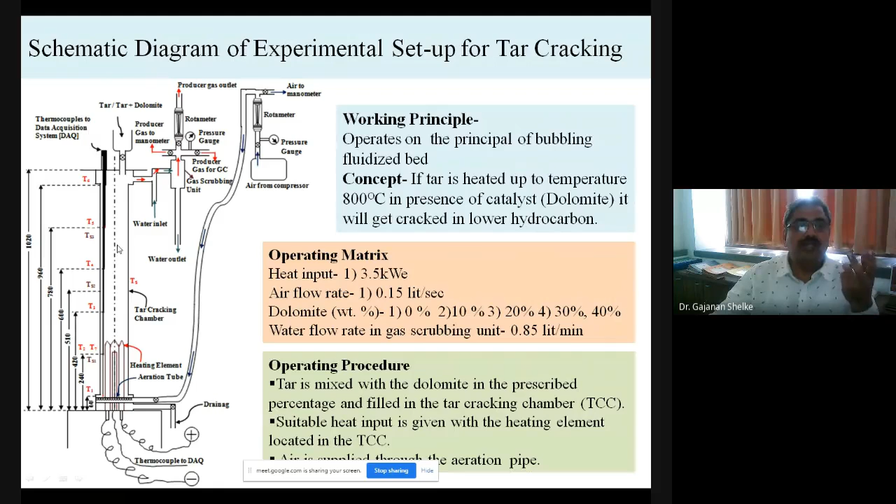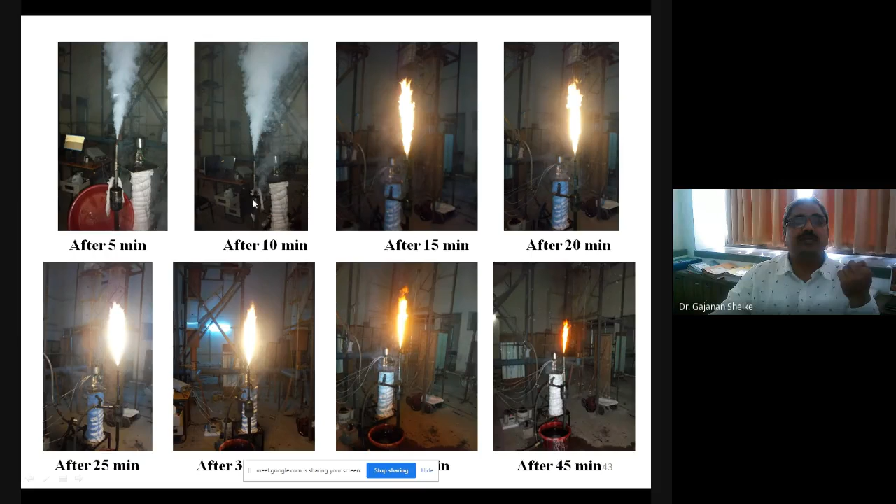You can observe this result. After 5 minutes, it starts to generate gas. After 10 minutes, this will be the position. After 15 minutes, it catches fire. After 20 minutes, this will be the fire. After 25 minutes, what will be the rate? So this will be the gasification. Then, because we did it as a batch process, as the tar is consumed, the flame will be decreasing and decreasing. After 45 minutes - we had carried out this experiment for 45 minutes. You are observing this.

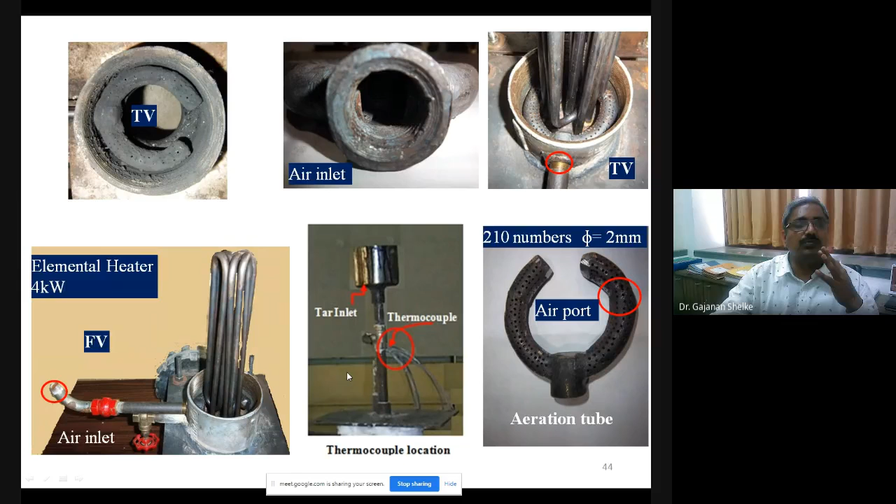So this part is the aeration pipe we used, heating element. This is the air inlet. This is the thermocouples - we also went for thermocouple thermal analysis. Elemental heater we had used. This is the air inlet, this is the gas outlet. What air is coming, that also we measured. What gas is going, that also we measured. Here we had variation of the heat input.

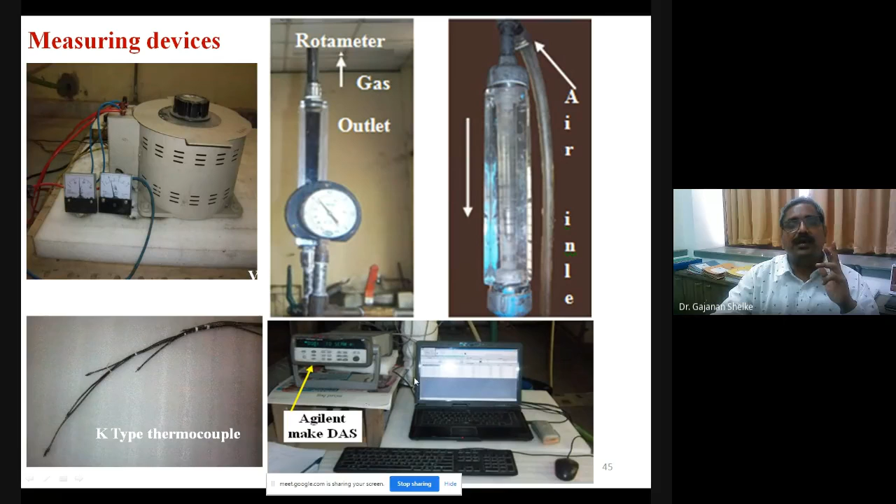So at most, this will be the reading. The weight of the tar was 6 kg, and at that time the rise in the bed height was 250 mm. So this was the in-house product. This was the in-house product - in the workshop of IIT Guwahati itself, we had manufactured this.

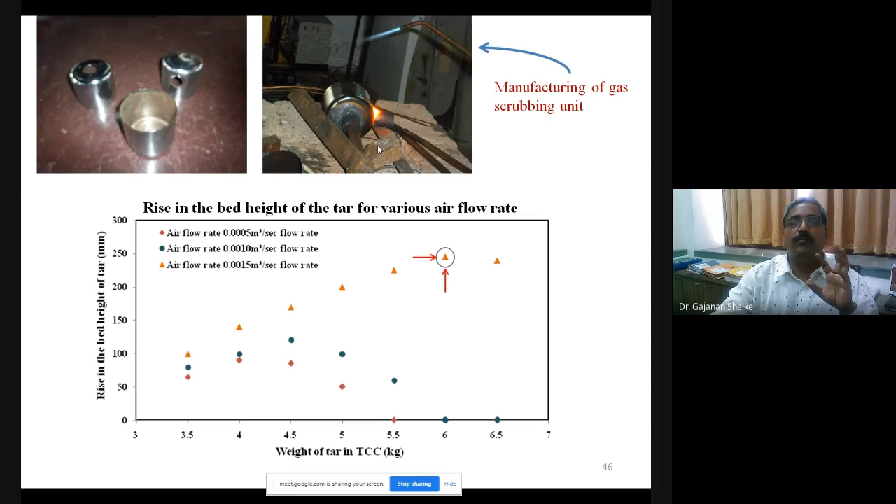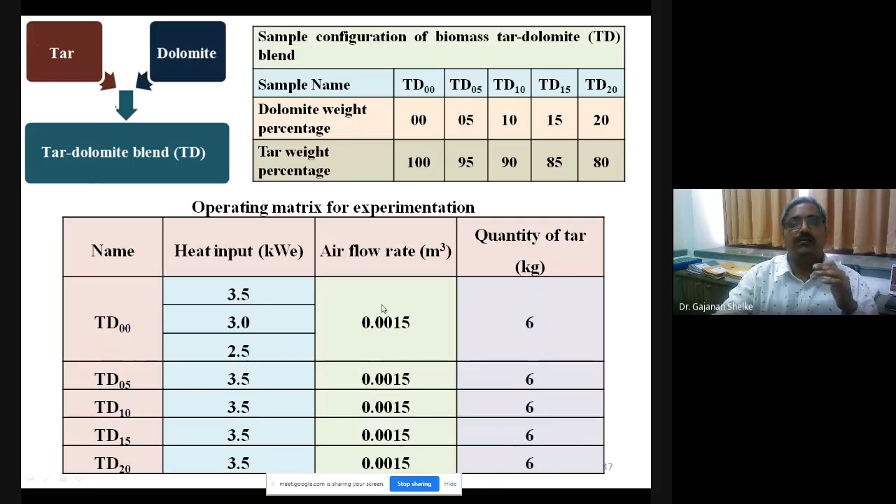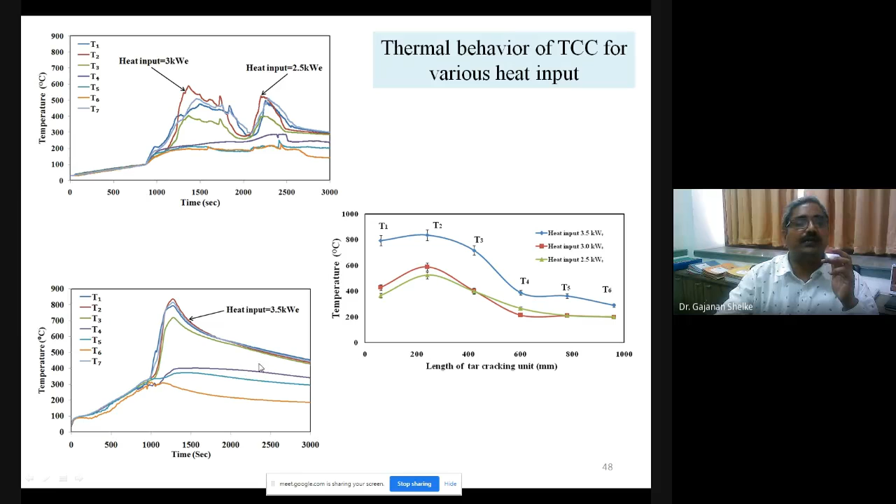So what we use is tar dolomite. We had formed various tar dolomite blends and gone for various airflow rates and heat inputs. Then we checked the thermal behavior. At heat input of 3 kilowatts, maximum temperature will be 600 degrees Celsius, at 2.5 kilowatts it will be different. This is the gross thermal analysis.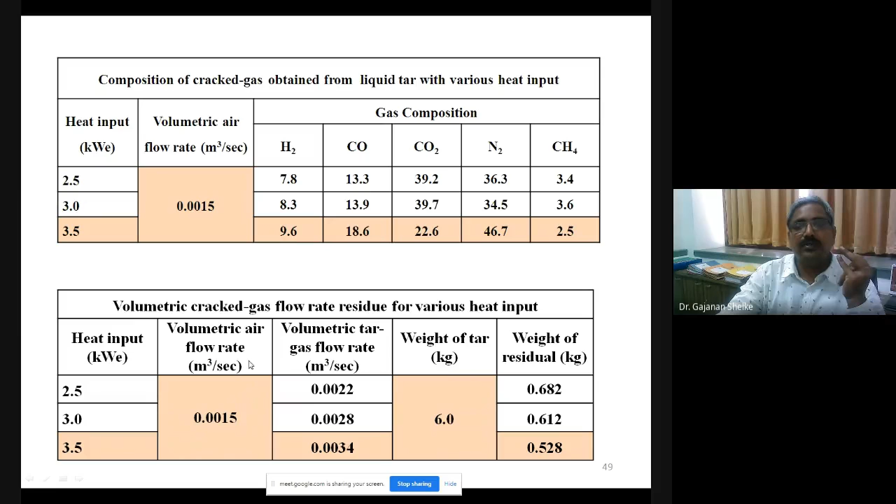So volumetric cracked gas flow rate residue for various heat input will be 0.0015. Weight of tar is 6, so that's the gas flow rate. Then this is the thermal profile in general.

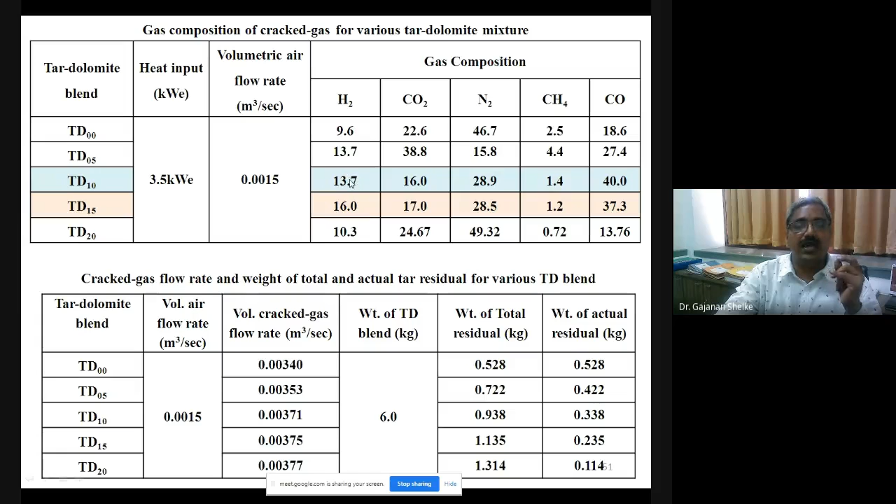So which one is better? That is tar dolomite - dolomite with 15% is the good composition. Hydrogen we are getting 16%, carbon dioxide 17%, nitrogen 28.5%, methane 1.2%, and carbon monoxide 37.3%. With a dolomite percentage of 10%, we are getting carbon monoxide 40%, but the hydrogen is slightly decreased, up to 13.7%.

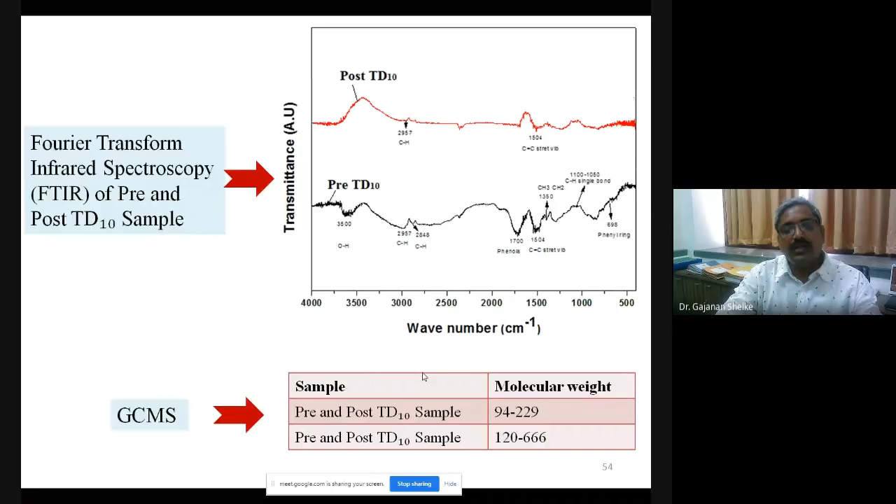So this is about some tests we had done. After this, recently we had gone for another gasification unit. My student, Professor Tushar Patil, is doing PhD on development of a 3-5 kilowatt power generation unit for power generation from agro waste with a fluidized bed gasifier.

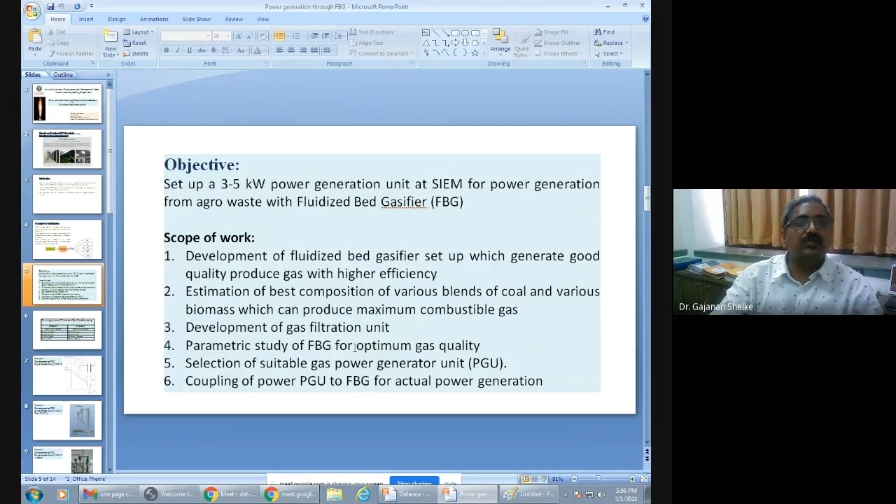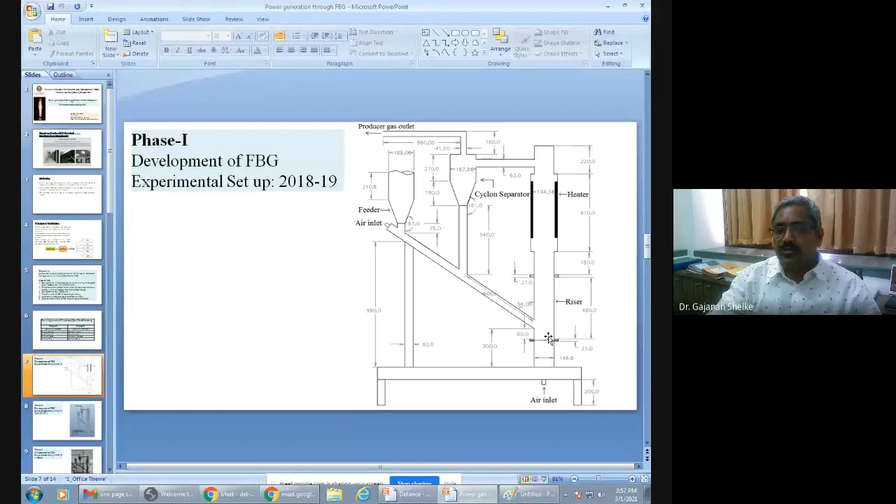What's the problem? This unit is unsuccessful. This is the actual unit you are observing. Air is coming from the downward, and as air is coming from the downward, that is creating back pressure to the biomass feed. Instead of going to the riser, the biomass is coming out from the feeder. So that was the major drawback. We had constructed this unit and were unsuccessful in that.

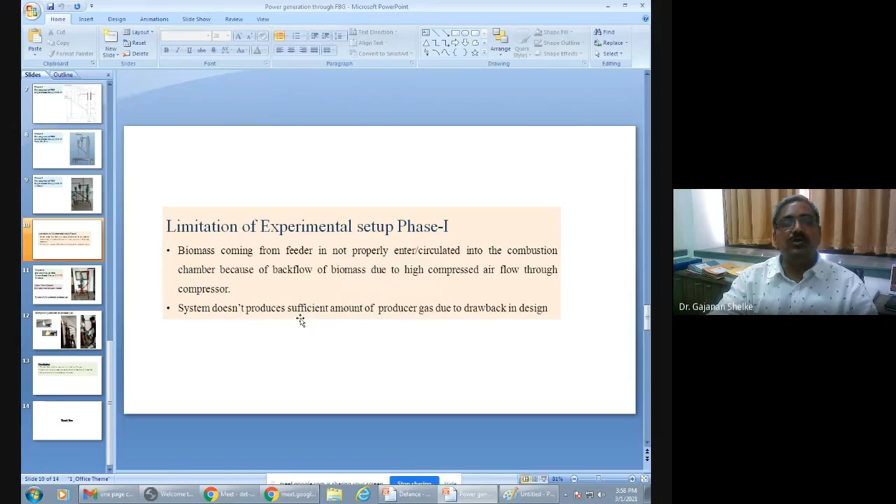But in the next year - this was the limitation: biomass coming from the feeder was not properly circulated into the combustion chamber because of backflow of biomass due to high compressed air flow through the compressor. The system does not produce a sufficient amount of producer gas due to the drawback in design.

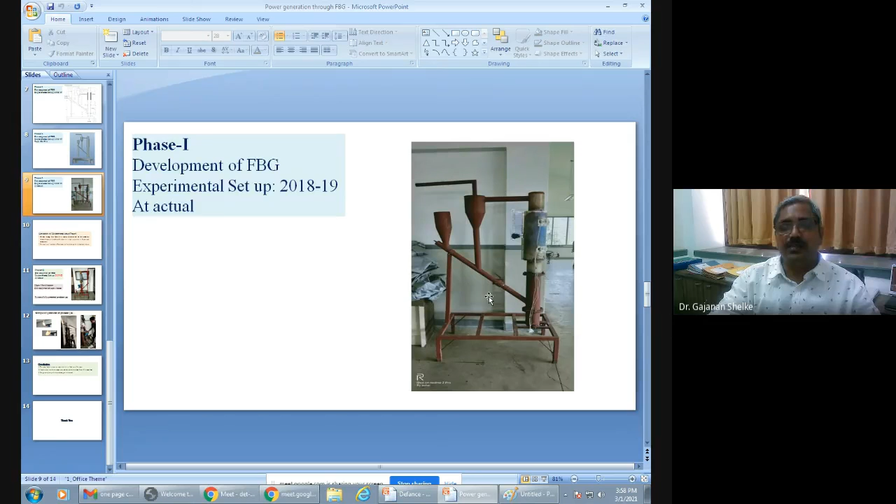Then what did we do? We removed that - same unit, same unit. What we had done: we removed the feeder, and instead of that feeder, there is a screw feeder - a major modification. We had added a screw feeder. Now we are feeding the biomass with this screw feeder, and this is the successful unit.

So the screw feeder played an important role in feeding the biomass. It also works like a one-way valve which restricts the back flow of the biomass feed. Good quality producer gas is obtained. Now we have to go for the analysis - thermal analysis, then hydrodynamic analysis, and onwards.

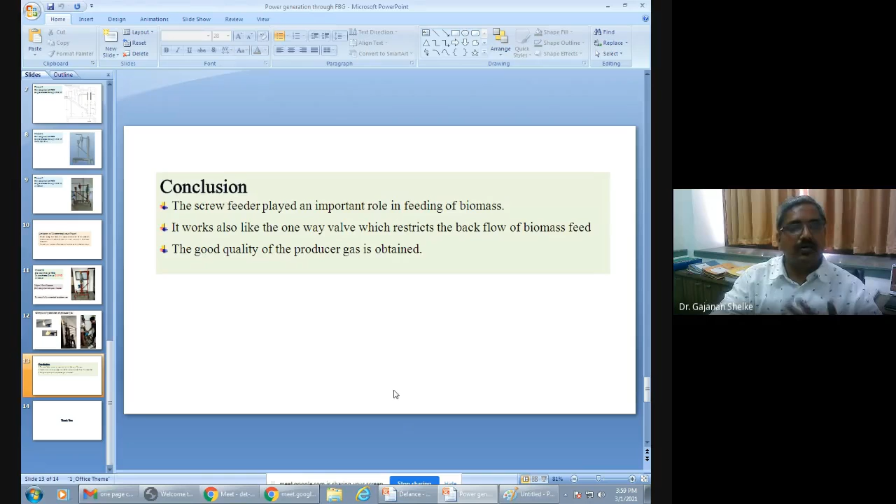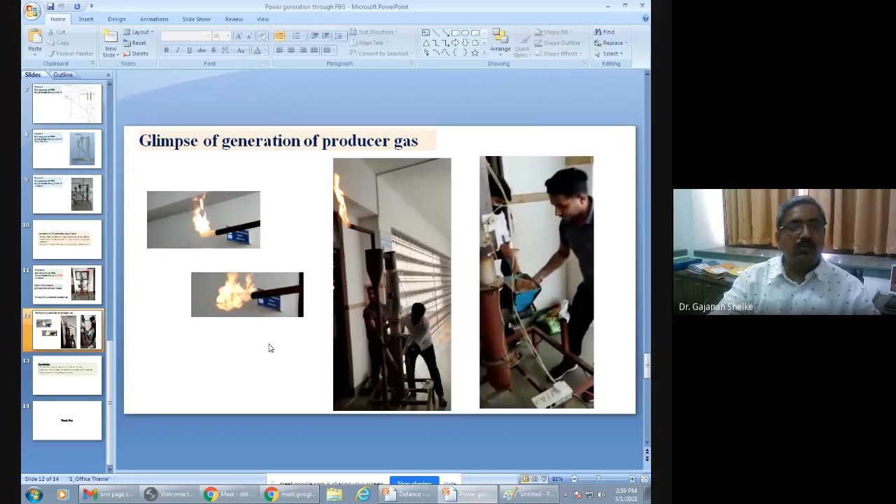So the first important phase, the production of the producer gas, we had completed, and this is the major success in the PhD of Professor Tushar Patil. So with this, I am very much thankful to all, and one important thing I want to specially mention here. I have to mention because you observed this. I had shown this figure to you.

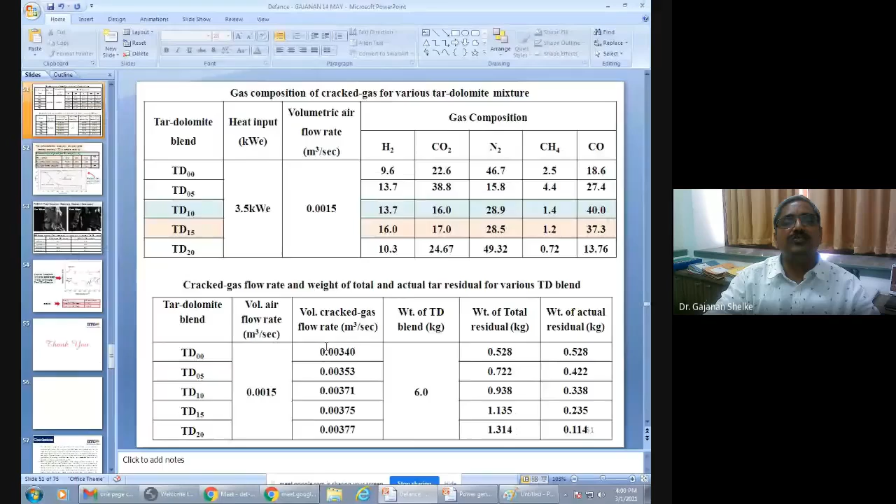This was the experiment I was performing in the energy lab, and this was successful at 1:30 p.m. I was carrying out the experiment, but I didn't know what time it was. And when it was successful, at the same time, I called my supervisor, who is a very generous person, Professor Pinakeshwar Mahanta sir, who is presently director of the NIT. At 1:30 p.m., he picked up my phone.

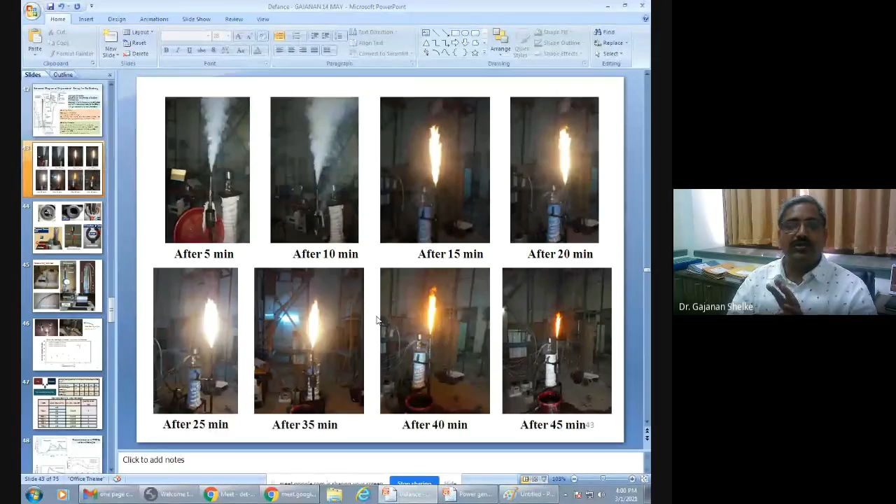He congratulated me, and he was ready, but I said, sir, we performed the same experiment on the second day, I will show you all the things. Then I showed him. But that was the spirit, that was the motivation that I received from my guide.

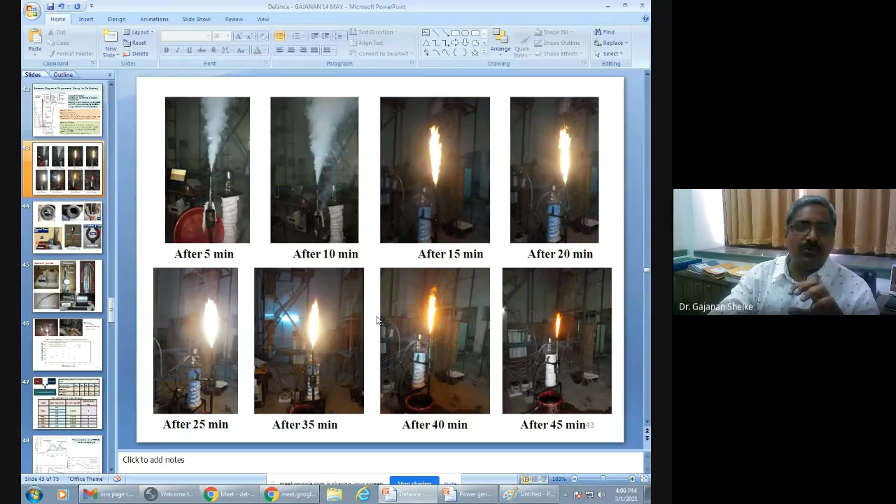So here I am very much thankful to my supervisor, Professor Pinakeshwar Mahanta, for giving the opportunity, and to my PhD mate, my good friend, Professor Manjula Madam. I am very much thankful. Now it is open for questions. Thank you very much.